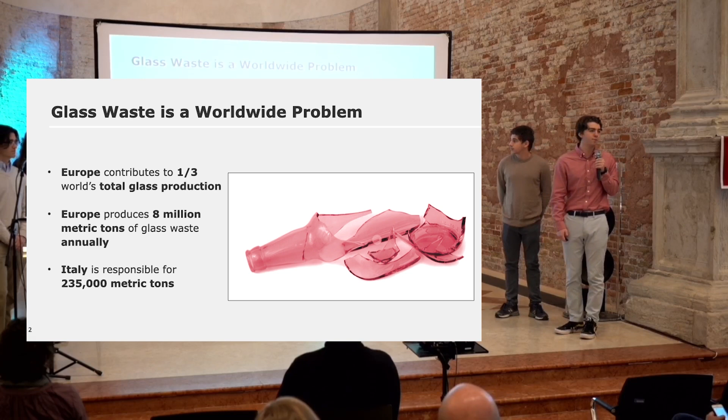Rehub is addressing this problem. They're a startup company based in Murano, created by Matteo Silverio, and their mission is to merge tradition and handcraft with innovation and design, striving for a zero-waste society. And they've won many awards for their work, including some from MIT DesignX, the Corning Museum of Glass, and the Wadsworth Atheneum.

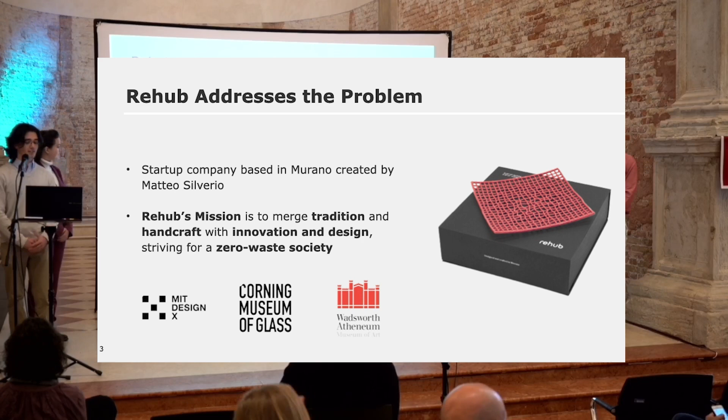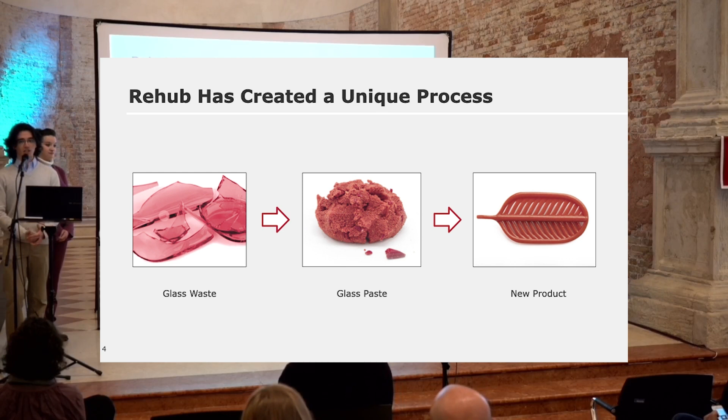They have a very unique process to upcycle glass that is formerly non-recyclable. They take that glass waste and they grind it down into a powder, and then they mix it with their proprietary binding agent to create the paste that you can see on screen here. They can then use this paste in manufacturing processes such as 3D printing, injection molding, and rolling to create brand new products like the one you can see on screen.

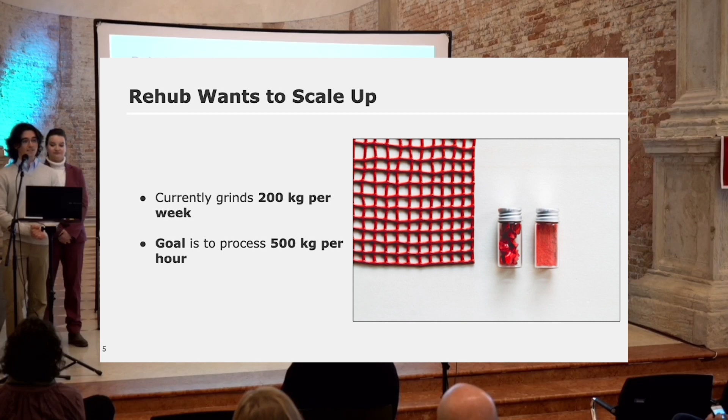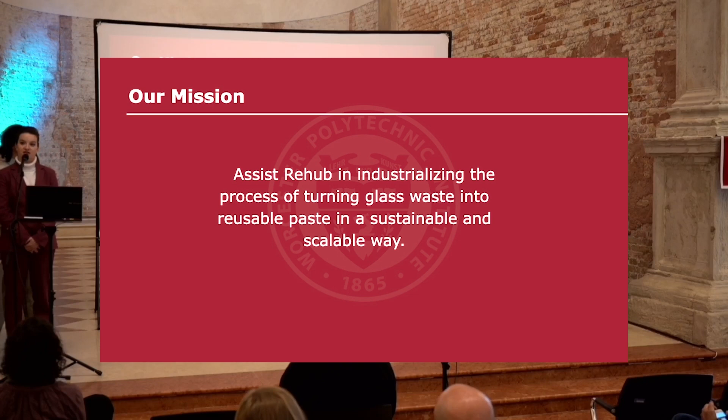But Rehub wants to scale up. Currently, they're only grinding 200 kilograms of glass waste per week. Their goal is to process 500 kilograms of glass waste per hour, as that is the amount that an industrial glass producer can create in that amount of time. This brings us to our team's mission, which is to assist Rehub in industrializing the process of turning glass waste into a reusable paste in a sustainable and scalable way.

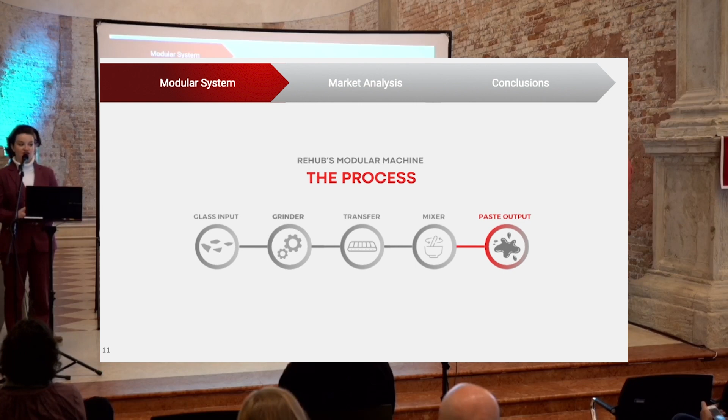Rehub has created a unique 5-step process to achieve this, beginning first with the glass input. Glass is inputted into the machine, where it is then ground down through 2 cycles into 2 consistencies of glass powder, a coarse powder and a fine powder. These are then transferred over to the mixing stage, where the 2 powders are mixed in proper ratios with certain binding agents, which then produce the proprietary paste. The proprietary paste is then brought to the paste output, where it is compressed of excess air and able to be manually collected for manufacturing use.

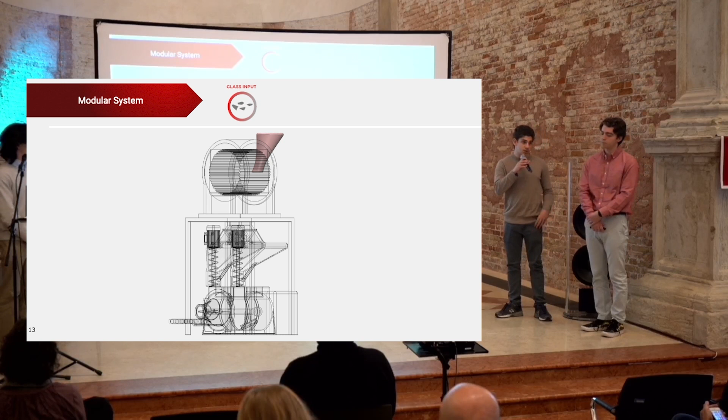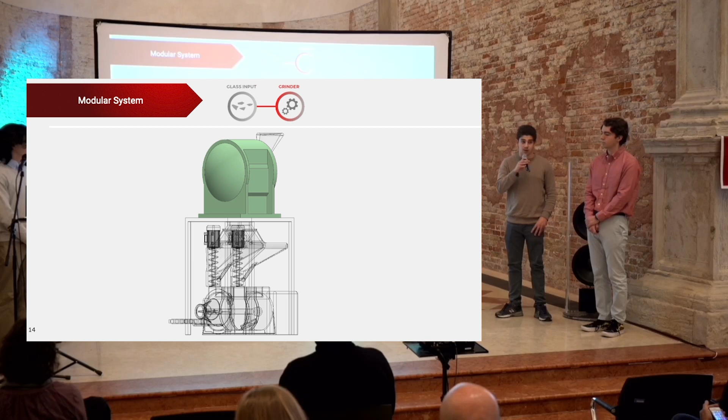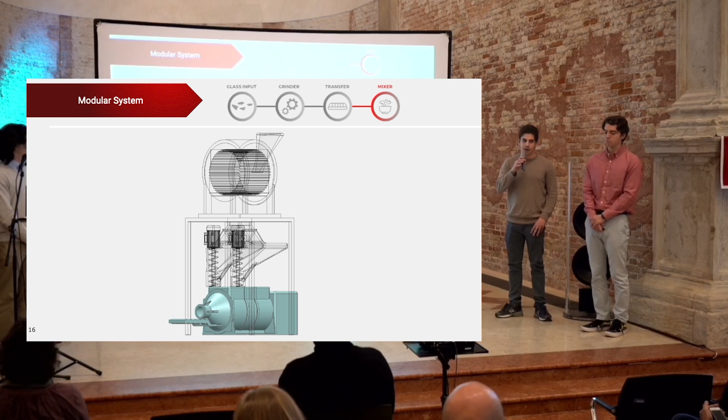If we visually go over the process again, we start with the overall machine package. We first start with the glass input stage. So the glass gets input into the grinder. The grinder then grinds the glass into 2 different consistencies that, when combined in different ratios, can create a unique appearance in the product. It then can be divided up into their own storage containers. It then gets transferred into the mixer. The mixer mixes it with proprietary chemicals and then gets compressed and output from the machine.

So we have some overall machine requirements that we need to meet. The first requirement is a 500 kilogram per hour throughput. The next requirement is to package the machine in a standard shipping container. The next requirement is have little to no human interaction. And then we need to be able to control the glass particle ratios to create this unique appearance.

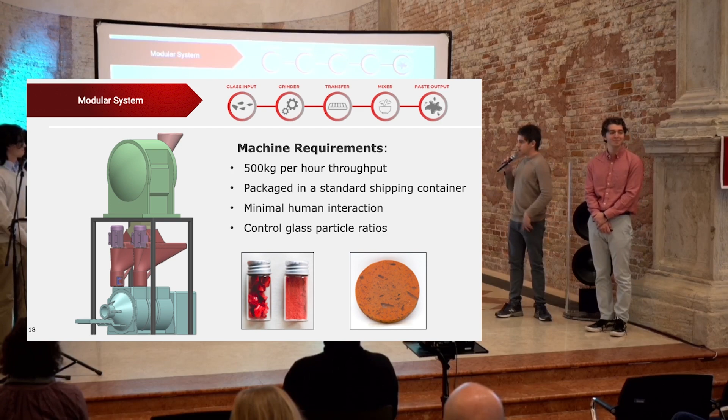So if we look at some images, the image to the left shows some coarse glass powder, and then the image to the right shows some fine glass powder. When you combine these in different ratios, you can create a unique product shown here and what Lexi just showed.

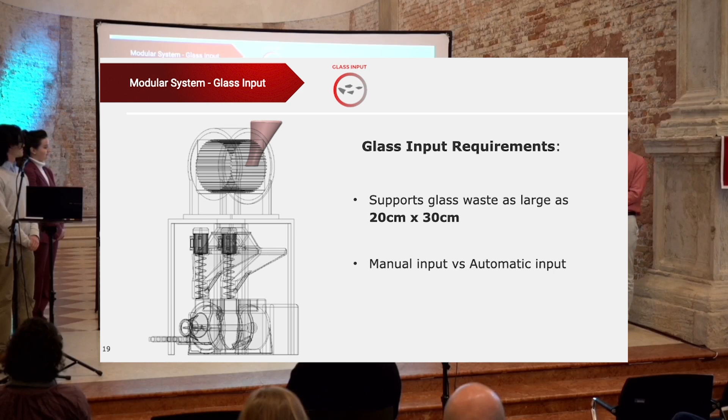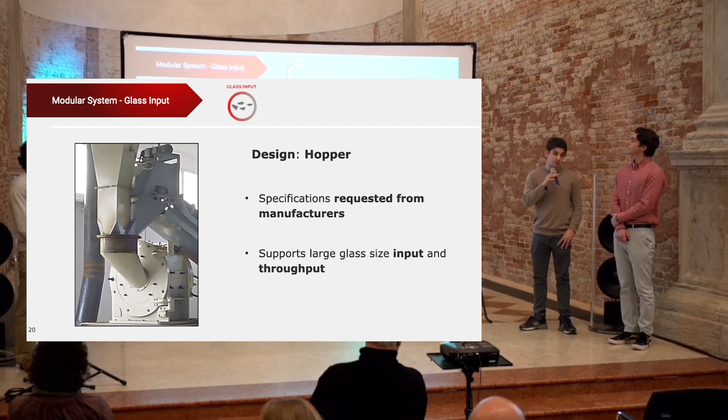So if we go into the specifics of the machine, again, we're starting with the glass input stage. Firstly, it needs to support glass waste as large as 20 centimeters by 30 centimeters, and then we needed to decide between a manual input versus an automatic input. So the team decided on a hopper as the most appropriate option. It can, in fact, support the glass waste input and throughput, and you can ask for the specifications from the manufacturer alongside the grinder.

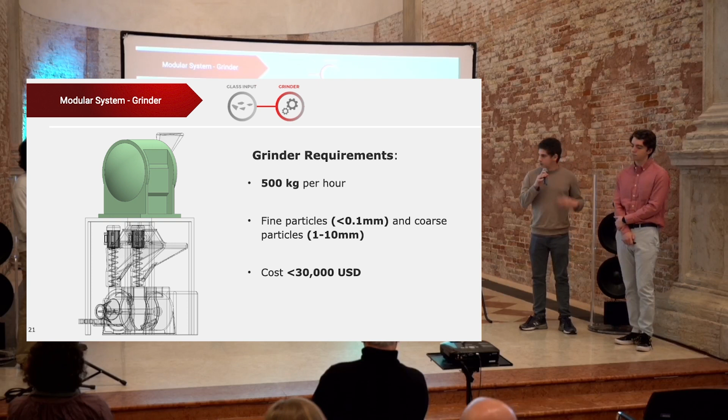The next phase is the grinder itself. So the grinder needs to be able to grind glass at 500 kilograms per hour, and it needs to grind that glass anywhere between 0.1 millimeters and 1 to 10 millimeters. And lastly, it needs to be below $30,000 USD.

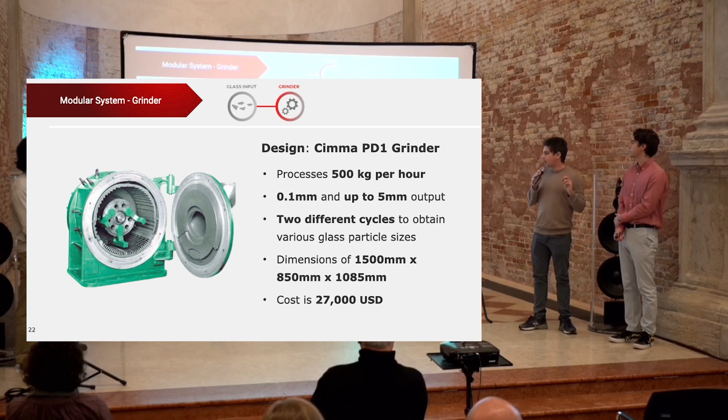So the team decided on the Cimma PD1 grinder. It can, in fact, process glass at 500 kilograms per hour, and it can grind that anywhere between 0.1 to 5 millimeters. It can do 2 different cycle times to acquire those 2 different particle sizes, as I mentioned. And these are the dimensions shown here. The 1,500 millimeter dimension includes Cimma's hopper, as I mentioned previously. And the overall cost is $27,000.

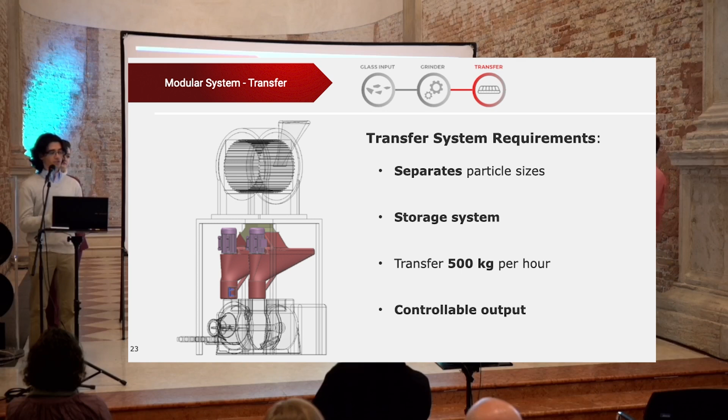The next thing we needed to develop was the transfer system. So it needed to separate the two particle sizes, the fine and the coarse glass, into their own storage systems. Each storage container needed to have enough overhead storage between the grinder and the mixer to allow for downtime in either process. And it needed to be able to support that 500 kilogram per hour throughput that the grinder is producing. It also needed a very controllable output into the mixer to really fine-tune the ratios of the fine to coarse glass to get a controllable look of the final paste product.

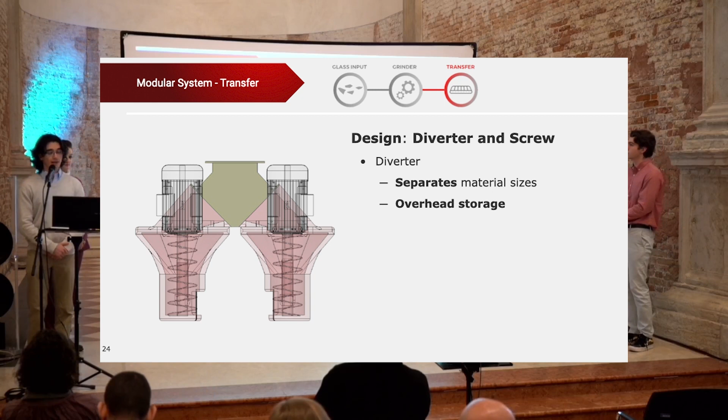This is the design that we came up with. It uses a simple diverter shown in gold on screen that separates the material sizes by blocking off the left or the right side, sorting the proper material into their storage containers, which you can see in pink. Those storage containers hold roughly twice the capacity of the mixer, allowing for plenty of overhead between the two processes.

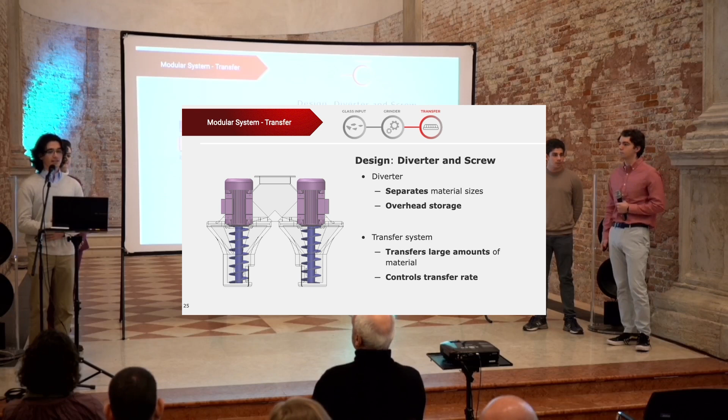Shown in purple here is the transfer system that we designed based off of the Archimedes screw to transfer the material into the mixer. It supports very large throughputs, meeting the 500 kilogram per hour throughput of the grinder, and it has a very controllable transfer rate. You can determine exactly how much material is input into the mixer by controlling the number of rotations that the screw makes.

In the second to last step in our modular process, the mixing stage, we were tasked with identifying a mixer that is able to match the grinder output. This mixer also needed to be able to have a binder and a colorant input to control the final paste consistency, as well as sensors that can monitor when the final paste is completed. We also needed some way that the mixing process could move the final paste into the output process.

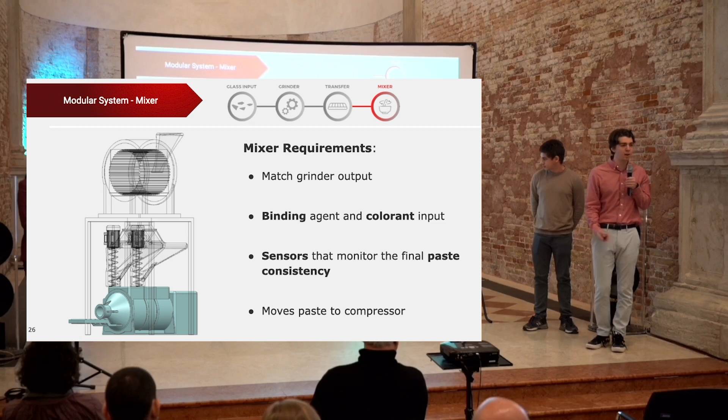We decided that the best way to do this was to design our own paddle mixer using different aspects from various industrial mixers that we identified. So as shown in red, that is our design. It is able to mix 100 kilograms of paste at a time. It has 3 different sensors, a moisture sensor, a torque sensor, and a pressure sensor to monitor the final paste, and it has input for the binding agent as well as different colorants.

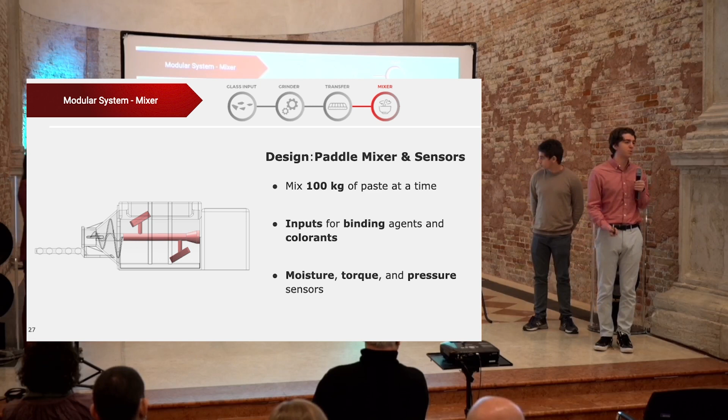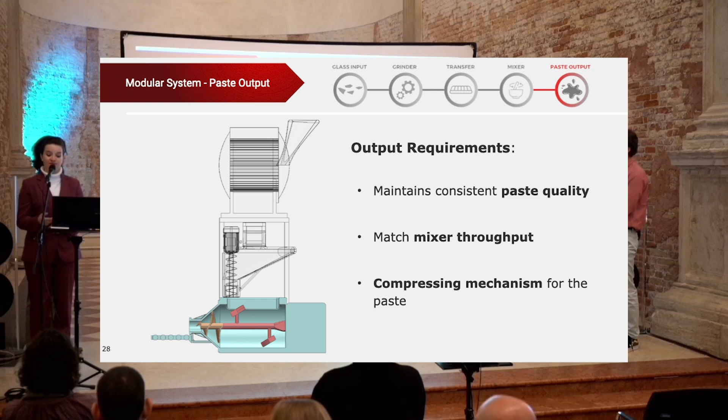The final section of the machine that we designed was the paste output, which had various requirements that we had to include. The first being maintaining a consistent paste quality throughout the process. It had to match the actual mixer throughput, as well as include a compressing mechanism to reduce excess air out of the paste. We designed different aspects of a pug mill into our own design, which allows excess air to be compressed out of a material.

We use this aspect to compress the paste, and then the brown screw shown on screen is what drives the paste through an increasingly small diameter to compress the paste where it can be manually collected at the end of the machine for manufacturing processes.

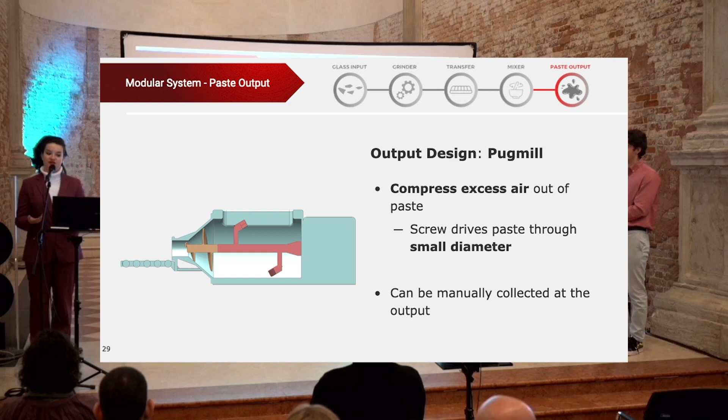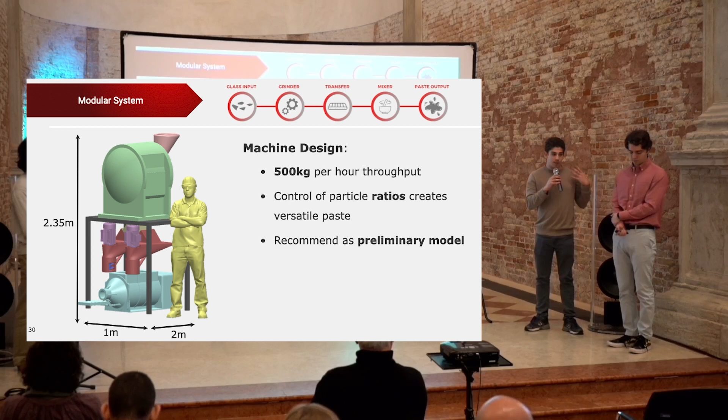This is our final preliminary design model of the machine. As you can see, the dimensions are shown here, and then we have a 6-foot tall worker for scale. So if the machine did, in fact, meet the 500 kilogram per hour throughput, it can in fact control these different particle sizes to create this unique paste appearance and therefore a unique product appearance. And we recommend that the sponsor uses this as a preliminary design to inform his future designs.

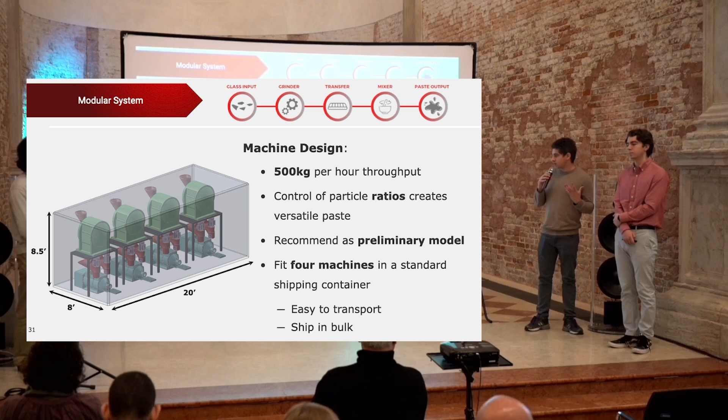And lastly, we can fit roughly 4 machines in a standard shipping container. We chose a shipping container because they're easy to transport, and as shown here, you can ship them in bulk, which will be cheaper.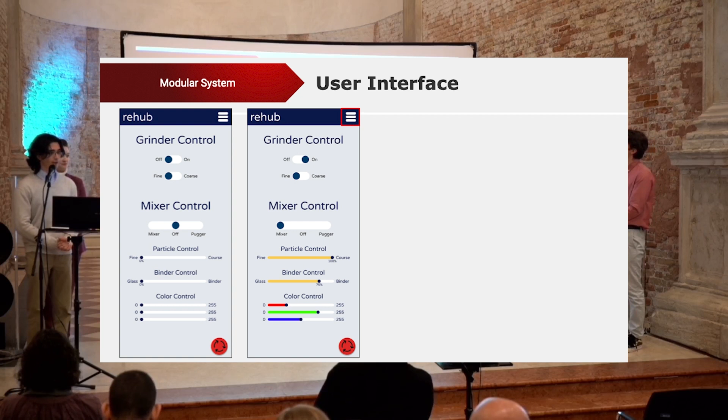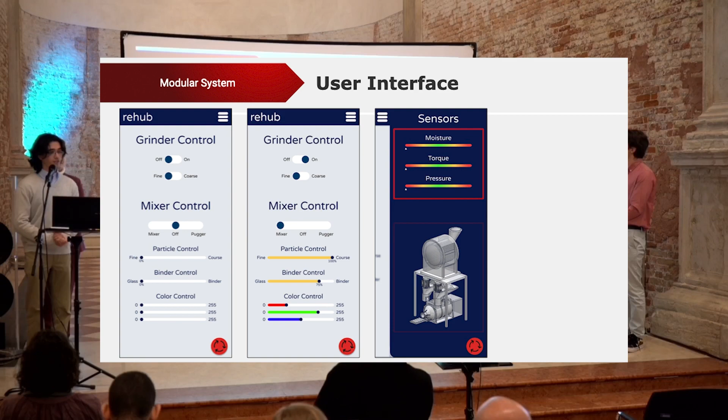In the top right of the screen, you can see a little white button. Tapping that or clicking on that will open up a side menu where you can see sensor information, allowing you to easily determine when the paste is finally finished. As well, you can see a model of the machine, which in this example here, you can see turns green if the machine is running to denote how it's working.

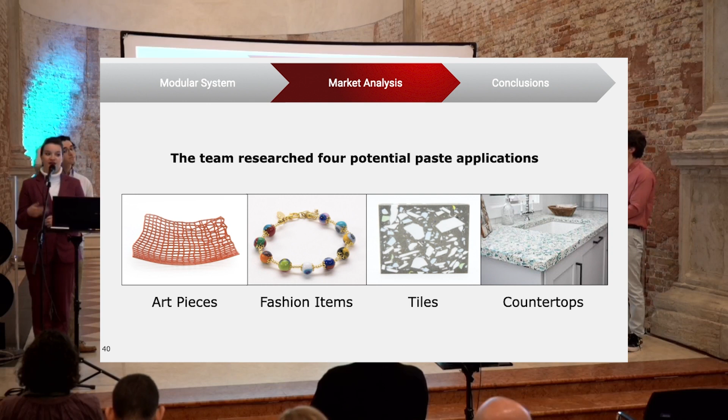Now that we have discussed how we will produce the paste, the team also researched 4 potential paste applications, which include pieces in the art industry, different fashion items, tiles, and countertops. The first industry that we researched was the art industry. Early Rehub products included 3D printed baskets, wire racks, bowls, vases, and other various decor items.

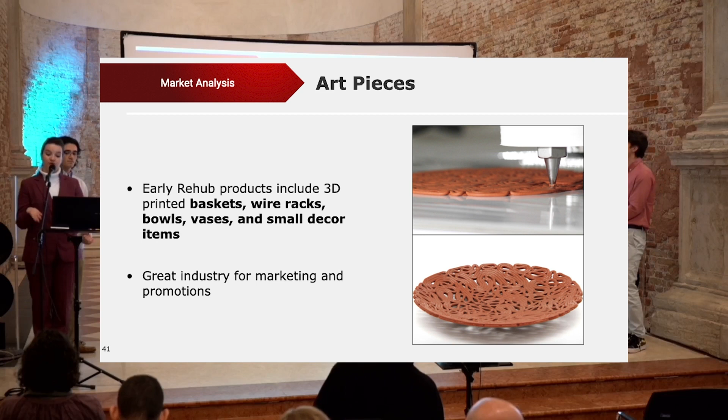As shown in the pictures, these processes begin by the paste being 3D printed and then heated to shape the desired bowl at the bottom of the screen. These products are great for marketing and promotion and is what Rehub currently uses the paste for in its early stage. However, the team notes that art material sales can fluctuate, and marketing and distributing the paste to artists could be difficult. Therefore, we suggest it is not the most reliable market to solely dedicate its paste to.

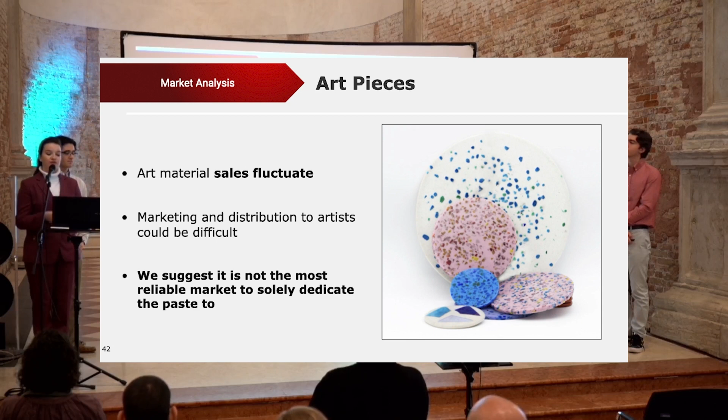The team also researched items in the fashion industry. It is a $341 billion industry worldwide. However, it is important to note that glass products contribute to at most 20% of this number. This is because gemstones and precious metals are already considered in the worldwide industry value. Ceramic, porcelain, and glass are the common materials used within this industry, as seen in the 3 pictures to the right of the screen.

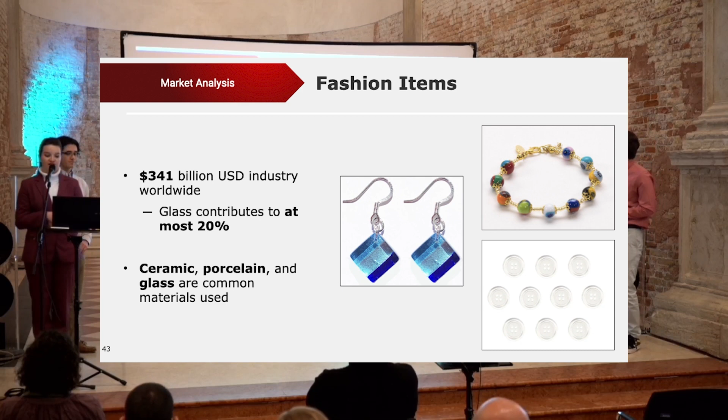We researched the cost and manufacturing techniques of common jewelry and fashion materials, including glass rods, glass sheets, ceramic paste, and compared this to the Rehub paste. While the Rehub paste is slightly higher in the average cost per kilogram, it is important to note that the hidden costs compared to the other ones are much lower, as you can use 3D printing and injection molding with the Rehub paste, whereas the others require human labor to handcraft the materials.

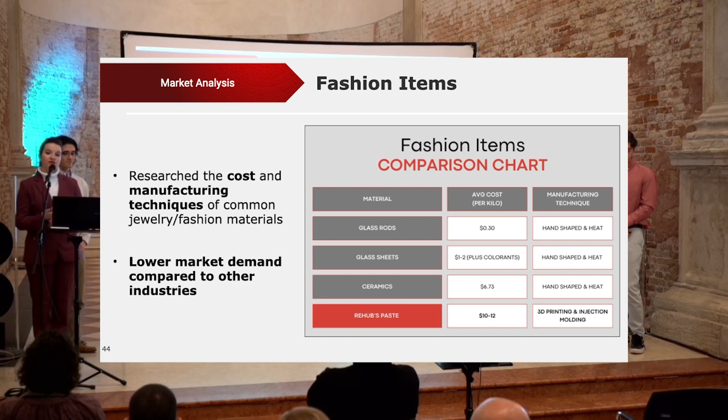It is important to note that the amount of paste used for each unit would be rather low in this industry as you're making small products. Therefore, it creates a lower market demand compared to some of the other industries we researched. Therefore, we suggest that Rehub explore other opportunities where it could produce the paste products in bulk.

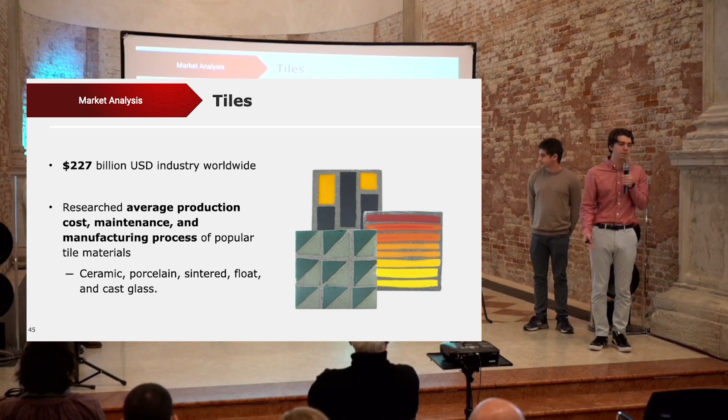However, we did note that with the grout and adhesives that need to be used in the tiling process, there's a severe lack of upcycling for the Rehub paste application. In order for us to align with our sponsor's mission more, we decided that this was not the best for the Rehub paste in order for the Rehub paste to be upcycled in the future.

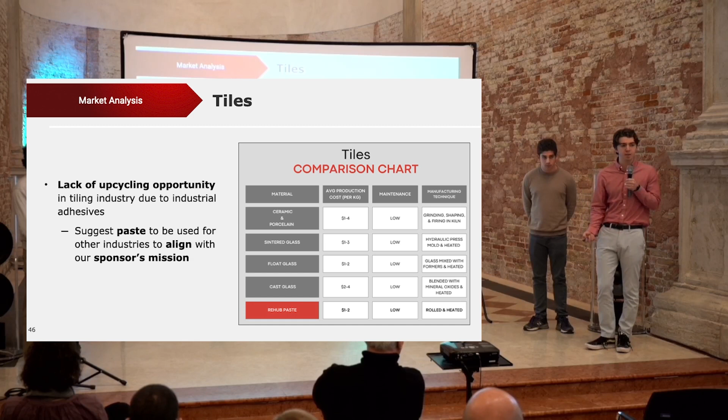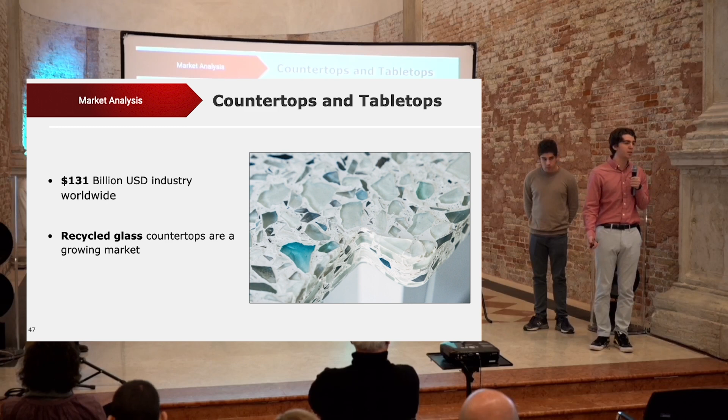The final industry that we researched was the countertop and tabletop industry. This industry is a $131 billion industry worldwide, and within this industry, recycled glass countertops are a steadily growing market. We researched similar common countertop materials, and we researched the cost per square feet for both the producer and the consumer, as well as the required maintenance and the manufacturing technique.

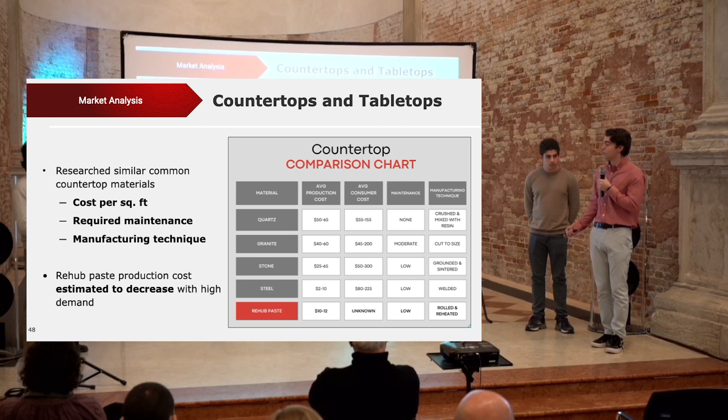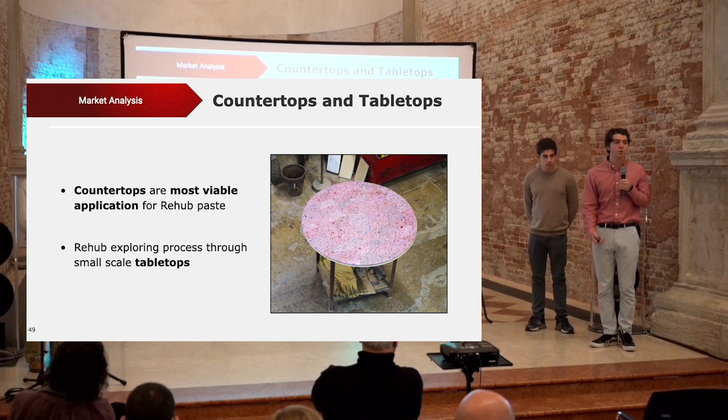As you can see, since the Rehub paste is made from recycled materials, the production cost is much lower than the rest of the materials, and the manufacturing process is very similar to quartz and stoneware. This led to our decision. Rehub paste production as well is estimated to decrease with higher demand, which makes the consumer cost lower. We decided that this makes countertops and tabletops the most viable market for the Rehub paste application. And as you can see on this image, Rehub is exploring this industry with smaller scale tabletops.

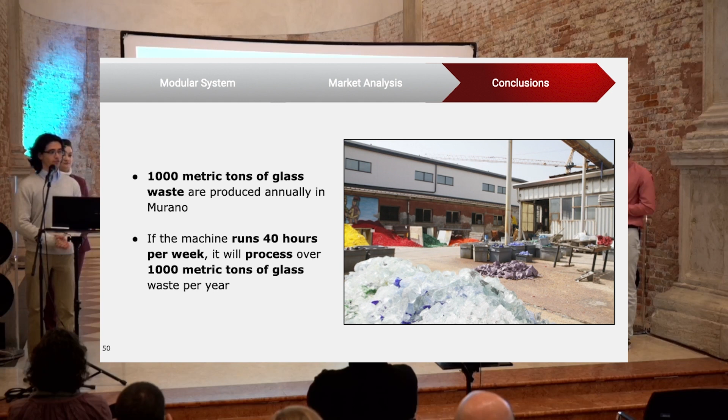So let's take a look a little bit at the environmental impacts of what we've done. So each year in Murano, over 1,000 metric tons of glass waste are produced. However, with just one machine running for 40 hours per week, we can process that 1,000 metric tons of glass waste each year. So on that scale, just one machine can cover all of the glass waste in Murano every year.

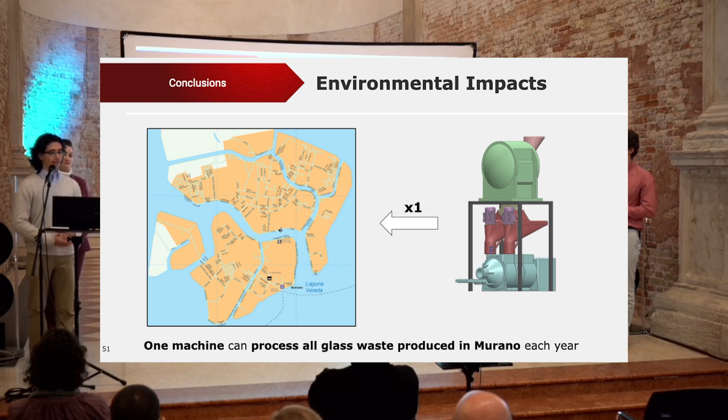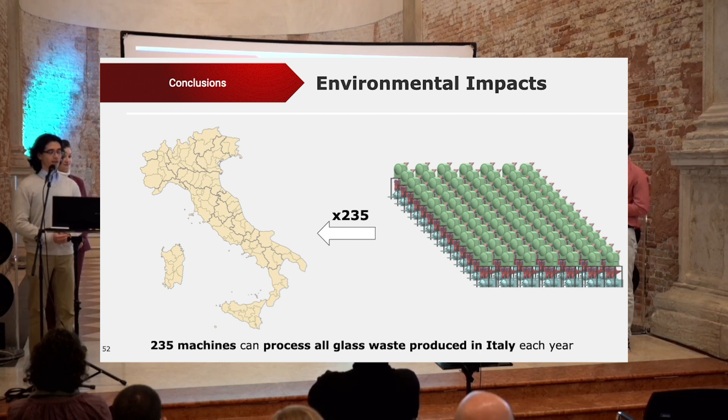And if we expand just a bit further, with 235 machines, we can cover all of the glass waste produced in Italy every year. So with that, we are very hopeful that our work can have a great environmental impact on this glass waste issue. Thank you all very much for listening.

The team will be happy to answer any questions at this time, and we will also pass around some of the samples for everyone to see. Anybody have any questions or comments before I pass the microphone to Matteo to hear what he thinks? Anybody else? Some of the other startups there in the crowd here? This is the kind of thing that students could do for your startup next year. Not necessarily an industrial thing, but.

You guys have a question? Okay. Thank you very much for the presentation. It was very inspiring as a solution. I think you run the company, isn't it? So I want to ask, is it already in production and you have the machine ready, or?

Really thank you. We have now, I mean, the process is the same, okay? We are running the process using different machines. The limit today is that every step we perform, we need human labor, which is not a problem by itself, of course, but it's not safe, it's costly, and it takes time. That's why we basically set up this challenge to the students, say, okay, guys, can we do something automatic?